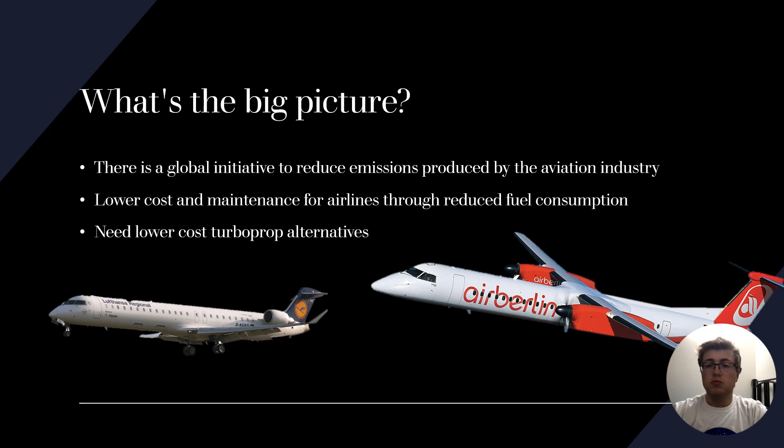It also can lead to a focus on more regional turboprop aircraft, simply because these powertrains can be very applicable to these more regional style aircraft, which can help to fill a gap in an emerging market for these smaller aircraft, especially in places like Europe and now growing in the United States as well.

Many groups have a stake in the regional aircraft market and Hybrid 7's brand. Here I have highlighted what is most important to each sector of our stakeholders and why it is the best idea to choose Hybrid 7 for your hybrid turboprop option. For our regional airline customers, we can promise reliability, marketability, and a reasonable cost. Hybrid 7 promises deliveries made on time, aircraft that airline customers are excited about and willing to get behind.

For our shareholders, we understand that it's important to make money. That is why we invite employees to share in profit with us. We also know that our brand and mission need to stay strong. That is why hybrid is in our name. Hybrid is not just a name, but a promise to deliver a new type of aircraft to the commercial market.

For our regulatory bodies, the US government, the FAA, and ICAO, safety is our number one goal while we strive to meet our ethical goals of reducing emissions. For reducing emissions in a safe and effective manner, Hybrid 7 is the way to go.

Our fourth stakeholder is the general public, full of travelers who invest their time, lives, and happiness into regional travel, from sports teams that are traveling to competition, to college kids returning home to visit their folks over the holidays, to vacationers traveling to a port town for a cruise. Our promise is that they need not worry about their individual contribution to humankind's carbon footprint. This is a new kind of airplane and an exciting new chapter in commercial aviation, a revitalization of the turboprop.

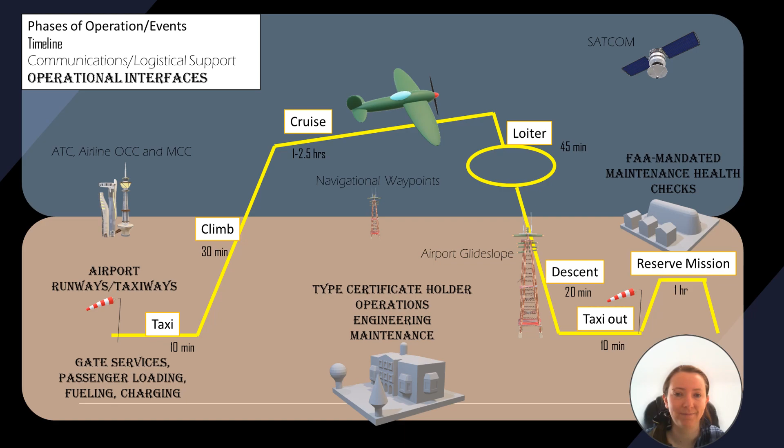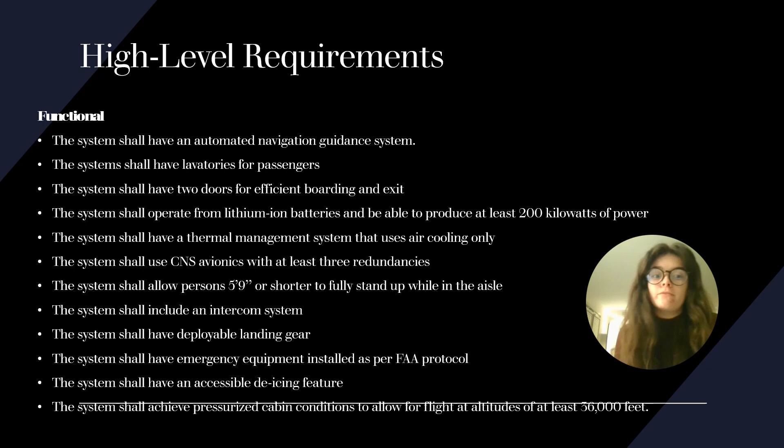So now we will dive into more of the details of the development of this system and look at the high-level requirements. And we'll start with the functional high-level requirements, which are just requirements that dictate how the system will fulfill its goals, its tasks for the user. And our main example of this is the system shall operate from lithium-ion batteries and be able to produce at least 200 kilowatts of power.

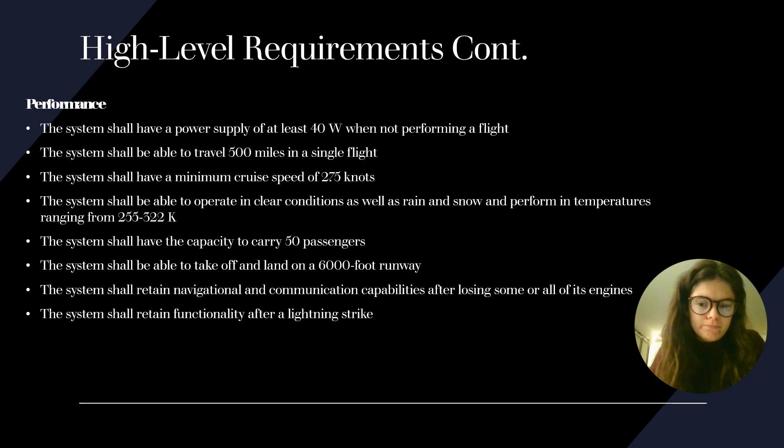Next, we have performance requirements, which speak to the operating capabilities and reliability of the system. An example of this is the system shall have a power supply of at least 40 watts when not performing a flight. And next we have constraints. These are restrictions, limitations, requirements that are set forth by the developers. And a good example of this for our system is the system shall include a thermal management system that adds no more than 30 kilograms to the total weight of the vehicle.

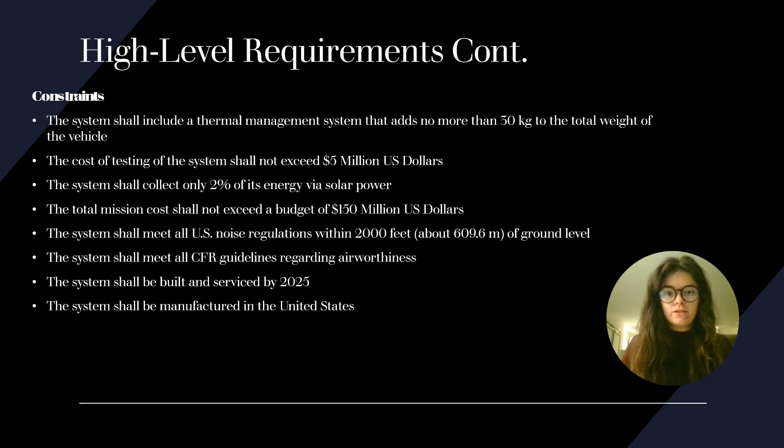While there are no real commercial hybrid turboprops in current existence, there's a lot of effort being put into studying the concept by a lot of major companies. Boeing has developed their hybrid truss-braced wing, which would really be compatible mainly with unducted fans like the CFM RISE. De Havilland and Bombardier have been investigating this as a concept. Safran has begun testing. A lot of companies like Pratt and Whitney are actually looking at this. They're currently working with De Havilland to develop a Dash 8 conversion.

Pipistrel and the DA36 E-Star have both been test articles using hybrid or electric powertrains. So a lot of work has been put into it. Obviously, there are some pretty big issues with the scaling of the technology, with the weight of the batteries, that have prevented it from becoming more commonplace right now. And obviously, there's a question of range, which is very critical with a commercial aircraft.

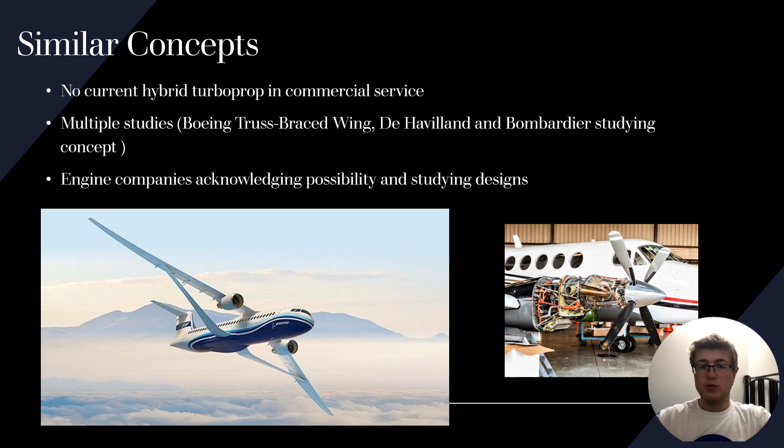The big functional requirements in play here: obviously the aircraft has to fly. It has to be able to, as a part of this, taxi, take off within 4,500 feet over a 50-foot obstacle, cruise for 1,000 nautical miles at full load at a minimum cruise speed of 275 knots true airspeed, and land in, again, 4,500 feet over a 50-foot obstacle. For transportation, it must carry at minimum 50 passengers and crew accompanying them.

It needs to be able to communicate both with air traffic control and over ADS-B. For navigation, it needs to both integrate modern avionics and also ideally have autonomous capability. Finally, the aircraft must be sustainable with a 20% reduction in fuel over a 500 nautical mile trip versus current turboprops. It needs to integrate well with existing infrastructure such as the wing size, baggage sizing, door placement, etc.

And materials and production techniques must be fairly common. There can't be anything too radical, just so it doesn't become prohibitively expensive or take too long to manufacture. And then obviously it needs to be easy for ground crews to maintain.

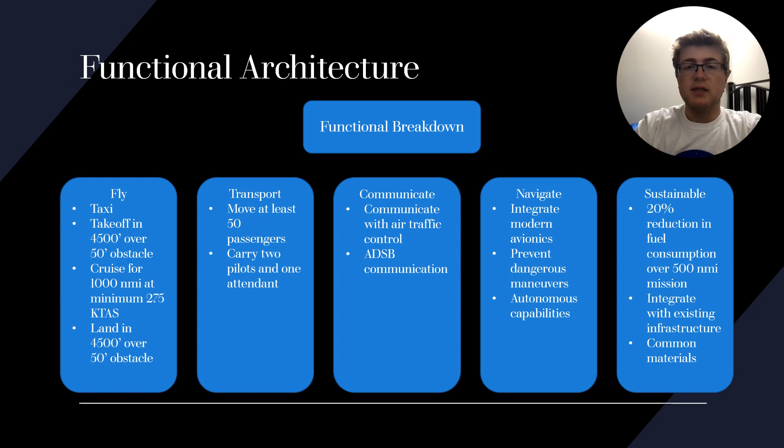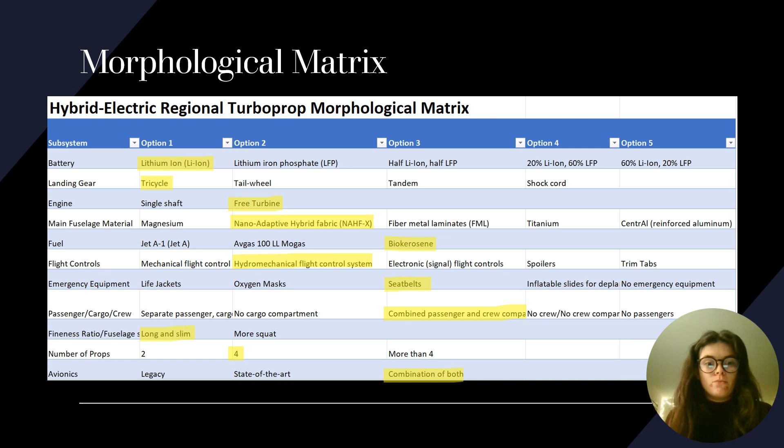Next, we have the morphological matrix for this system. On this graphic, you can see all the different subsystems we have laid out with all of our different options that we considered, so that we can make sure we are selecting the options that fall best into our criteria of safety, environmentally conscious choices, and affordability. We can see that with the main fuselage material being nano-adaptive hybrid fabric, which is highly resistive to flammability, and also using biokerosene fuel as opposed to the more traditional Jet A fuel.

The aircraft's current position, engine status, heading, airspeed, and all relevant information is displayed on the flight deck, where the flight crew can monitor and make inputs. All inputs to trajectory made by the flight crew are fed through the AutoFlight system, which limits accelerations for maximum safety and comfort for the passengers. The aircraft automatically transmits location, air data, and engine information to air traffic control and operators via transponders. Flight crew are able to communicate by voice via high-frequency radio transmission.

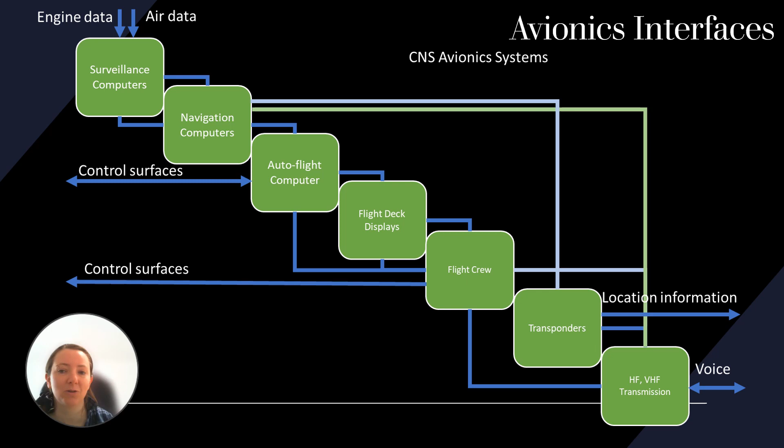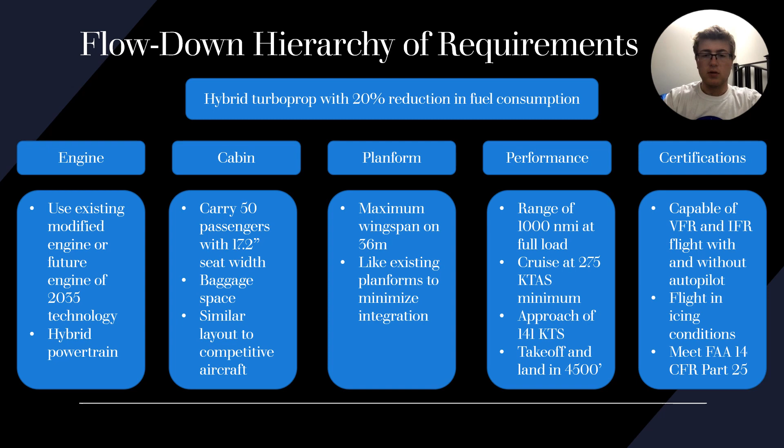Now that IRA has outlined our specific requirements, we can begin to conduct trade studies on potential technologies that could work to meet our requirements. Trade studies are important in systems engineering because they help engineers make informed decisions about which design alternatives are the most suitable for a particular system. A trade study is a systematic analysis of different options, evaluating the advantages and disadvantages of each alternative against a set of criteria and constraints. This process is crucial for ensuring the final design meets the requirements, performs optimally, and is cost-effective.

Trade studies provide several benefits in systems engineering: they identify the most promising design, they reduce risks, and they balance competing priorities. For example, trade studies help engineers balance competing priorities such as cost, performance, and safety to arrive at the best design alternative for a particular system. For our aircraft, the trade study we decided to perform was on airframe materials, and our objective is to evaluate the suitability of different airframe materials for a new airplane design based on their performance against the specific criteria previously mentioned by IRA.

First, we will start with our criteria. The airframe material is an important factor to consider when designing an airplane for several reasons. First, the weight. The material used to construct the airframe has a direct impact on the weight of the aircraft. The heavier the airframe, the more fuel the airplane will need to carry or power it will need to produce, and the more difficult it will be to maneuver. Therefore, choosing a lightweight but durable material is crucial to optimize fuel efficiency and performance.

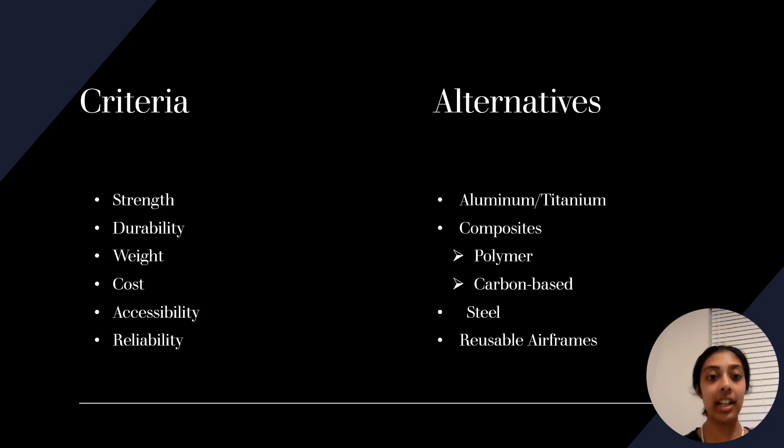Based on the criteria and trade study technique, the preliminary decision is that composites are the most suitable airframe material for this airplane design. While composites may be more difficult to maintain, their light weight, strength, and durability make them a great choice for improving fuel efficiency and maneuverability while still supporting the weight of the aircraft and its payload. The cost of composites may be higher than aluminum or steel, but the overall balance of cost, weight, strength, durability, all of our criteria, make them the most suitable material for this design.

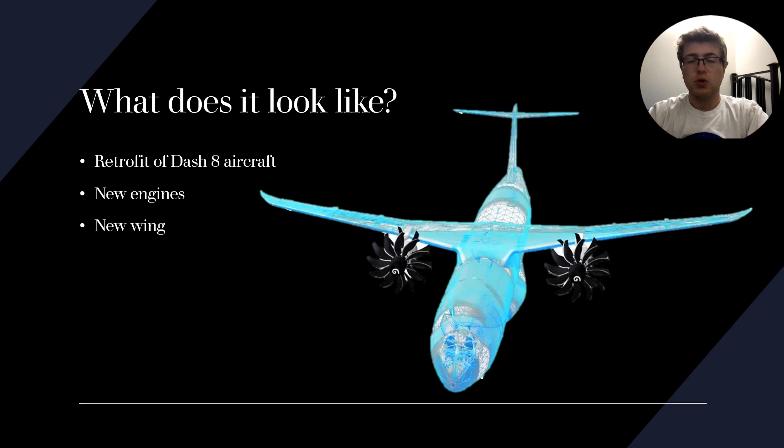Finally, for the concept architecture, we're looking at a retrofit of an existing Dash 8 airframe. The wing and engines would be replaced for a much more modern, updated aesthetic and obviously performance, with new engines and a new wing for that efficiency. The avionics would be replaced for modern standards, the engines would be upgraded to a hybrid CFM RISE derivative, and the platform is already reasonably efficient; that new wing would maximize it and make sure that you could hit that reduction in fuel consumption. The highlight of this configuration is the CFM RISE engine that would be powering it.

CFM is actually already looking at developing it into a hybrid powertrain, as you can see here from this engine image that they provided. So obviously that's being worked on, and it is expected to be ready by 2035, so that meets the requirements there for the critical component, the engine.

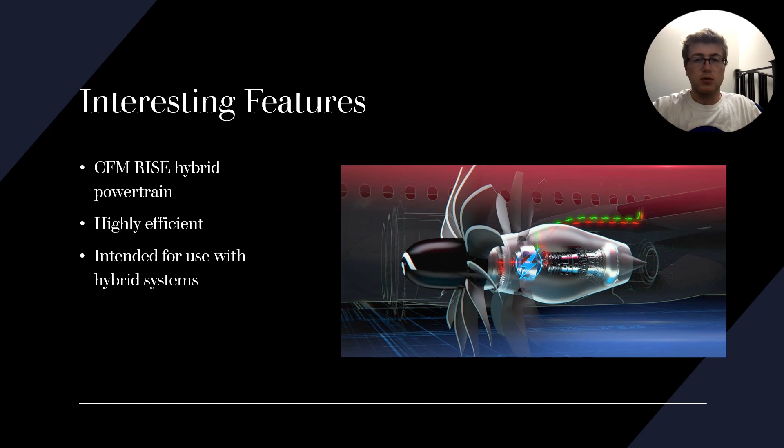Obviously the big advantages here are how this would be a fairly low cost effort relative to developing an entirely new aircraft. You would simply be transitioning over to a new wing and a new engine that could be assembled as two parts and bolted onto the airframe in a similar mounting structure with the existing wing, saving on cost and retrofit time. Additionally, you would be able to minimize the amount of recertification work that you have to do, as the core of the airframe would be staying the same. New avionics, new engines, new wings, but it saves a lot of effort and a lot of cost and a lot of time there.